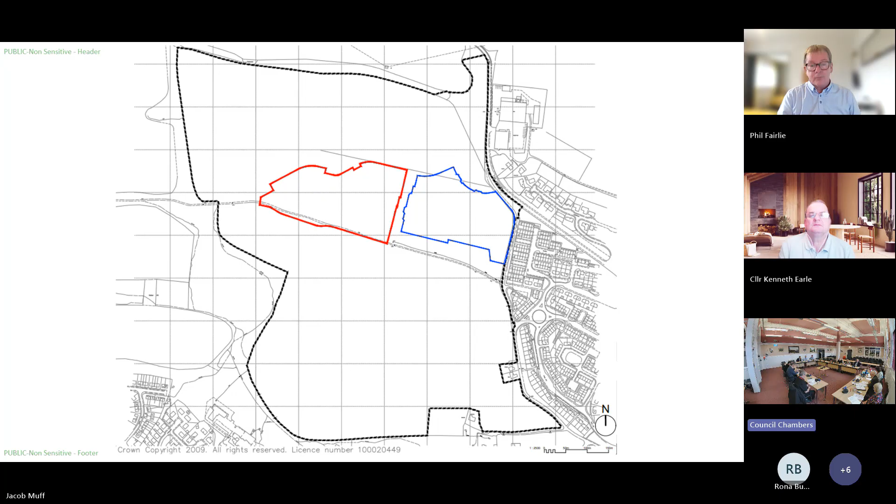This paper is an application for approval of matters specified in conditions concerning the 74 house phase at Barnesville, presented by Jacob Muff, principal planner. The background is that when planning permission was granted for the whole site, certain conditions were laid down, which Jacob will go into. Our job today is to approve the matters specified in conditions have reached a satisfactory standard, and we can allow the development of phases 2C, 2B.

Go ahead, Jacob. Good morning, Chair. The application we're looking at today is for matters specified in condition, as you just said, of the earlier permission in principle, which was approved a couple of years back now.

So it relates to the area in red, and there's already been a number of decisions on the wider site, with the background and history given on page 8 of the report. In summary, the site has been approved in principle for up to 1,000 new homes, associated infrastructure and a school. A master plan for the site was also approved by committee in 2023, and none of the earlier matters can be revisited.

This application looks specifically at the detailed design of phases 2B and 2C only, and the conditions of the original permission are broken down throughout the report with an assessment provided for each area. That's the area in red.

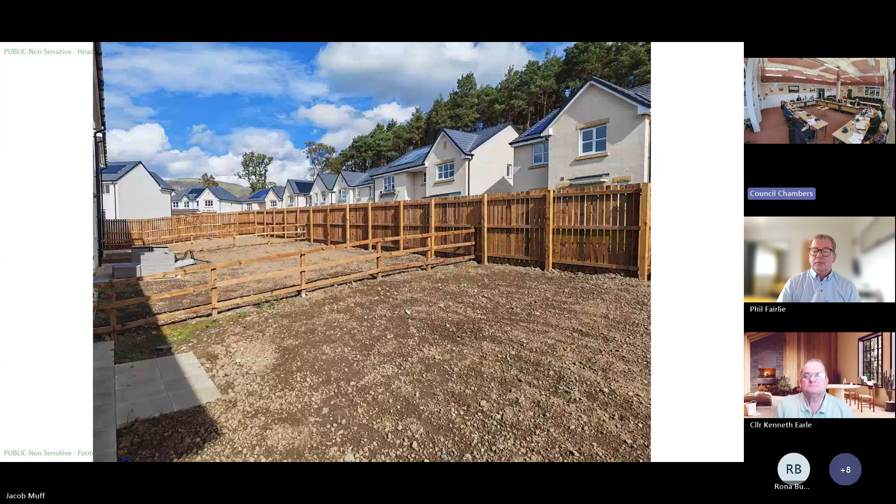This is one of the finished properties, has a paved driveway and is fronted with what will eventually grow to be a new hedgerow, similar to what is proposed on some of the plots here. It has an open plan arrangement to the front, with more private garden areas to the rear. Again, that's similar to what is proposed on these phases of development.

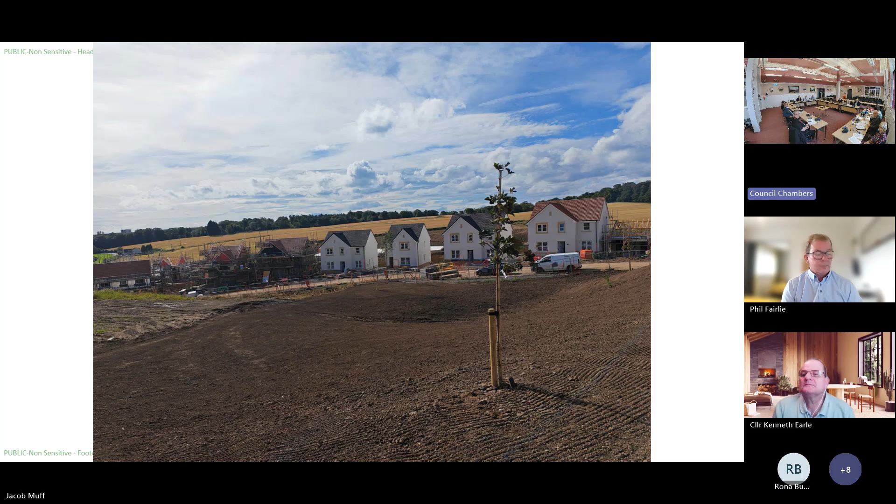All of the properties will have integrated solar panels and present a mixture of different property types, roof designs, finishes and colours.

Render is the dominant material, and the designs are influenced by the other properties seen in the locality. It will form an extension of the existing neighbourhood with connection via a green corridor, focused around the rerouted core path from 10 acres, which forms part of our considerations today.

The phasing plan has already been approved, and phases 1A, 1B and 2A have been given detailed consent and are underway. We're recommending approval of phases 2B and 2C, importantly subject to the conditions listed in Appendix 1.

The main body of the assessment starts on page 12 of the report, and going through the report, conditions 1, 2 and 8 of the original permission don't require any further actions at this point for the reasons set out.

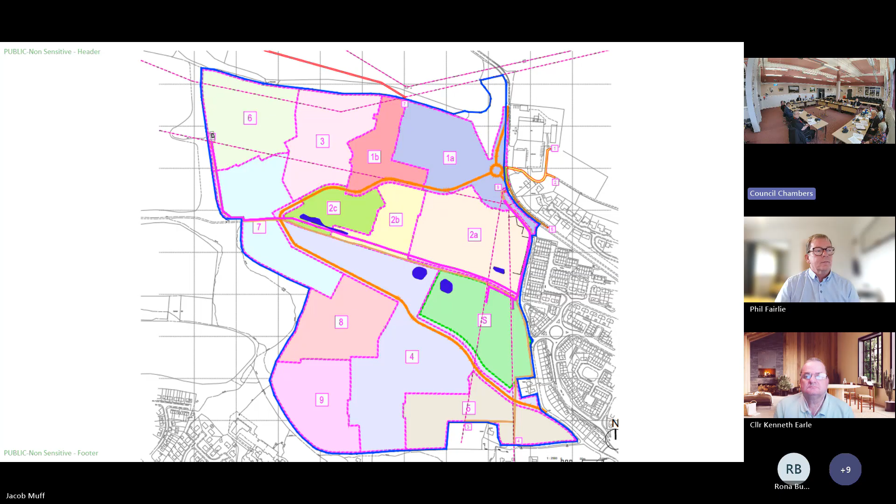Condition 3 has been covered by the earlier approval of the MSC application referred to in 3.36 and was subject to separate conditions applied to that approval, which have satisfactorily been discharged, so they're not revisited.

In terms of the other conditions, condition 4 seeks many details as noted by the various headings. This development proposes 8 different house types throughout this phase, and although they vary in size, they keep similar proportions and similar heights throughout the development.

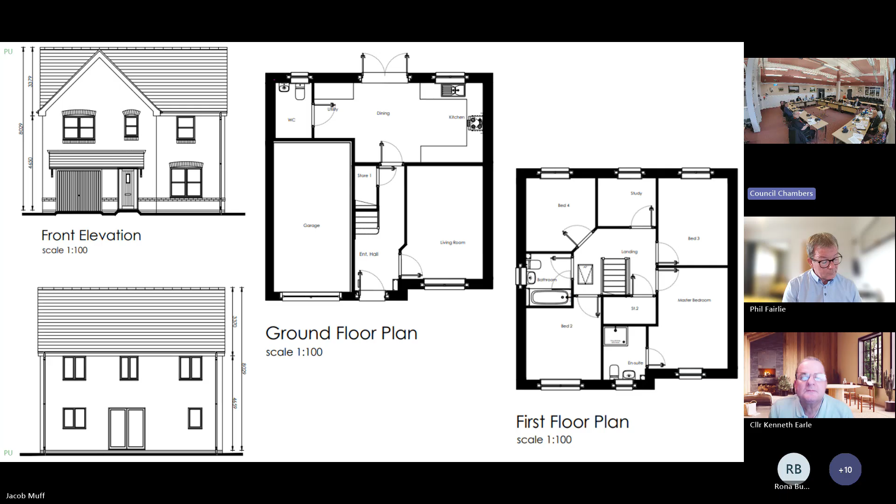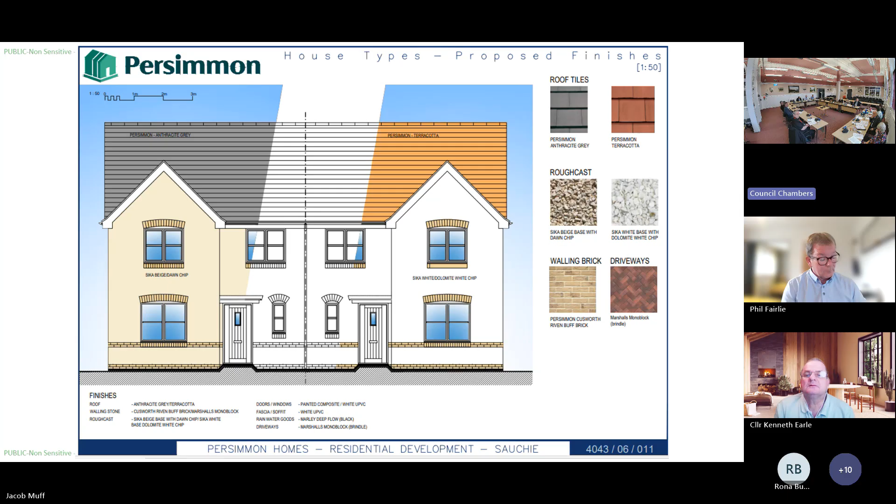The boundary treatments are similar to the photos that I showed earlier, and children's play facilities are currently under construction in phase 2A of the wider development, which was approved by the earlier master plan.

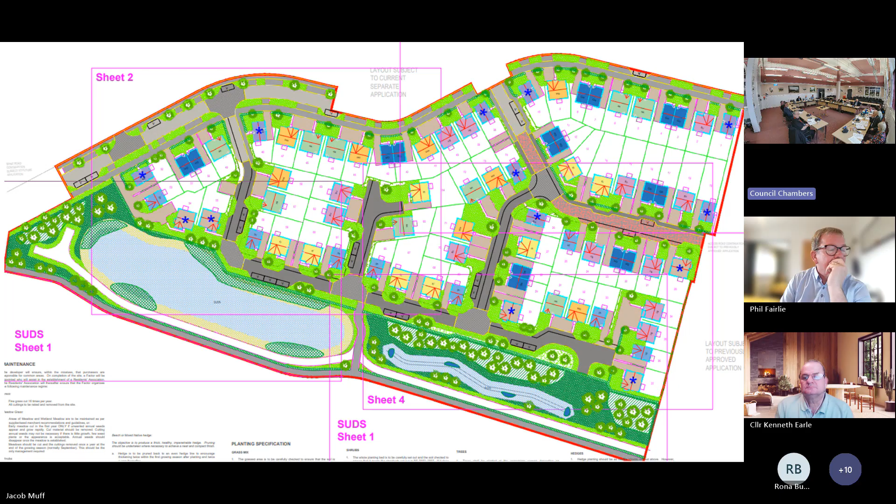The proposal is supported by a comprehensive landscaping plan with more than 200 trees, 1,000 shrubs, and hedgerows which consist of more than 3,000 individual plants. They're also proposing wildflower areas and grassed areas.

With respect to land levels and finished floor levels, each property will have a relatively flat garden, and they will all have level access to each of the main doors.

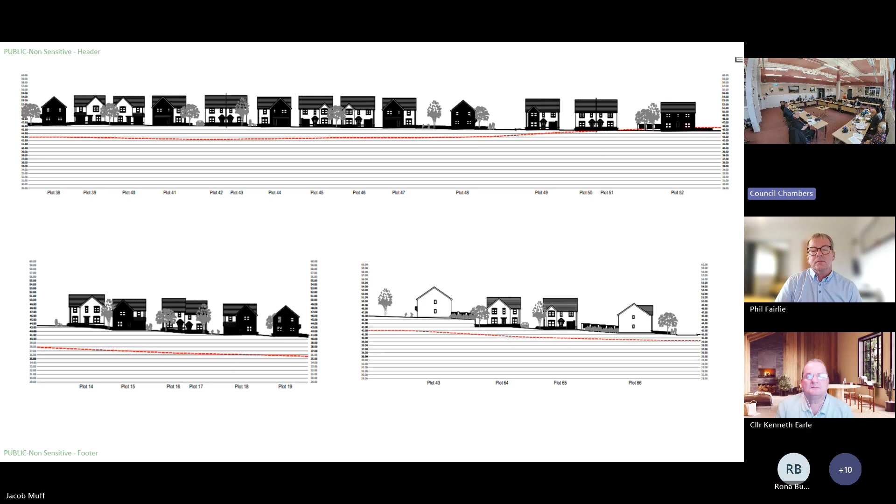The rerouting itself is not considered to raise any concerns, but as seen in the consultation responses from roads and the sustainability team, there were concerns with regards to land levels and the gradient of the path. As it stands, the core path is a relatively flat route with good accessibility, and the rerouting is required to allow the necessary infrastructure to be introduced, but as shown, would become steeper with the proposed arrangements.

We've discussed the rerouting with interested parties, including the Access Forum, Transportation Team and Sustainability Team. None of these have an objection to the slight shift in the route, but we think that a more suitable gradient can be achieved. We've had some discussions with the developer at this point.

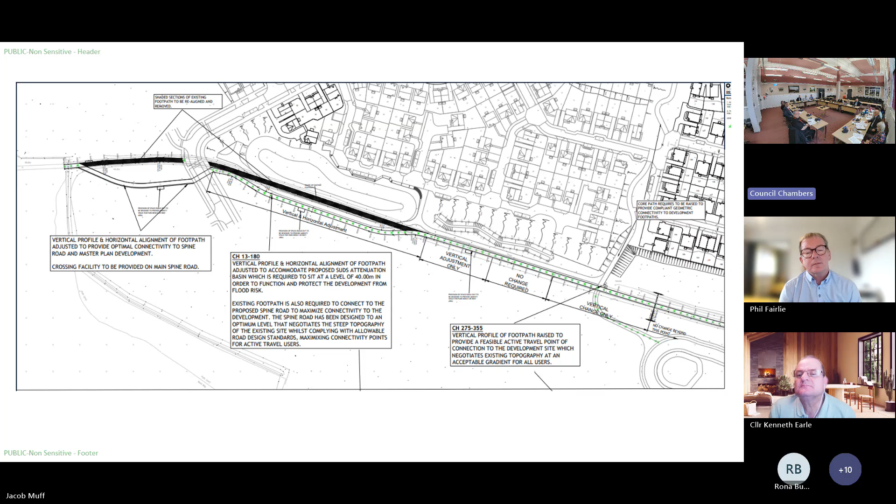Therefore, as part of Appendix 1, we're proposing a condition for a technical assessment to take place separately and to basically keep this as an acceptable gradient.

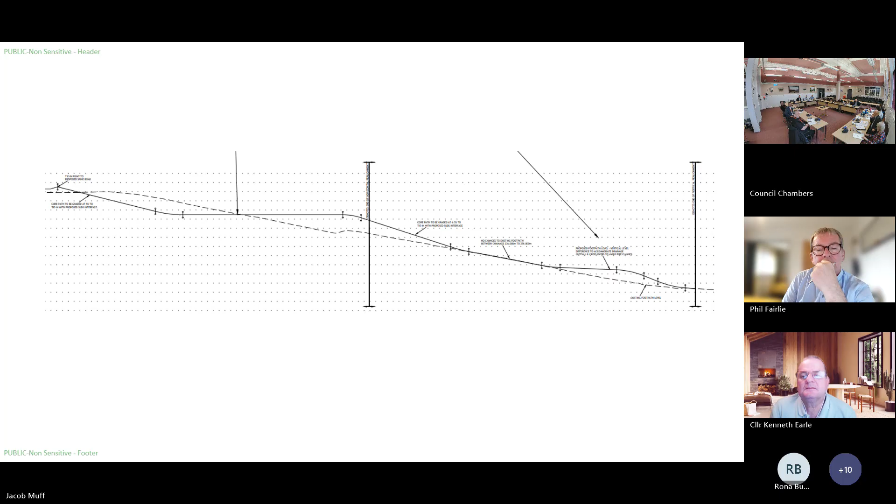In respect of Condition 5, the proposal is in accordance with the earlier approved phasing plan, and there are no concerns raised in relation to flood risk and drainage, with the swale and pond designs designed to an adoptable standard by Scottish Water. There are no trees on this part of the development site, and significant planting is proposed.

Our contamination advisors have raised no concerns, but conditions are also suggested. Although further exploratory works are required and potential mitigation for past coal mining works, the Coal Authority have raised no objections based on the level of information submitted. Licensing will also offer sufficient control in respect of the safety and stability of the land.

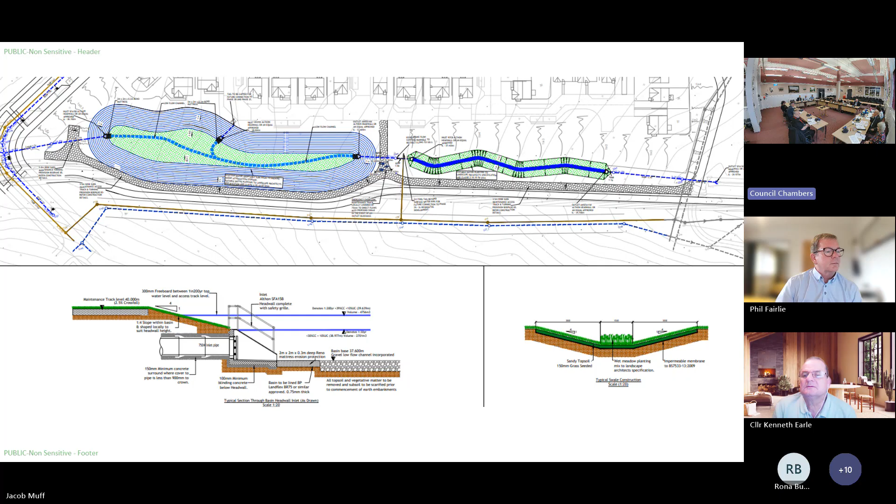With regards to the construction and environmental management plan, there were some issues with these on earlier phases, which appear to have died down a little bit at the moment, but we're looking to reiterate this through a further condition.

The transport impact of the development has been assessed and raises no concerns, and appropriate travel plans, which include sustainable travel, are in place. The noise impact of the development and air quality impact assessments are considered to raise no concern following assessment by the Environmental Health Team, and providing the recommendations of the report are implemented, are acceptable.

Public art is proposed throughout the wider scheme, and consists of a number of Corten steel panels. These are to be delivered in 2032, but form part of the underlying legal agreement as well for the wider site.

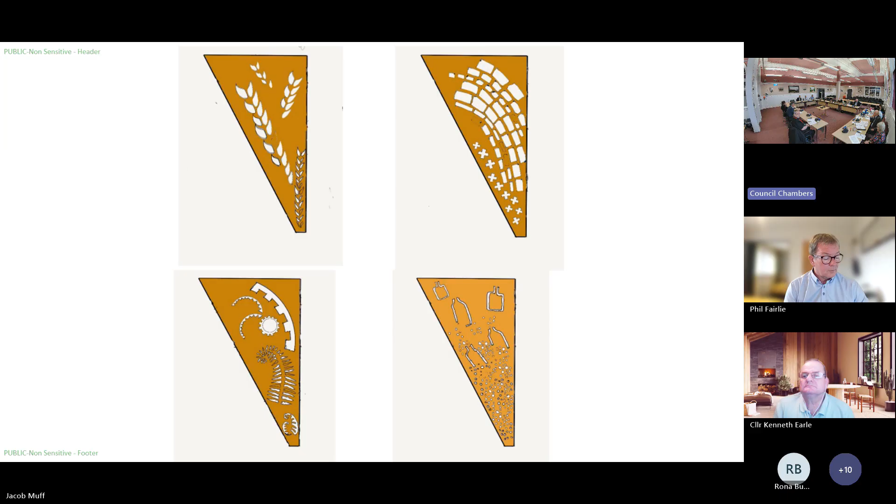Finally, I couldn't find a picture for archaeology, but this relates to Condition 6 and 7. Although there appears to have been some evidence of potential habitation on or close to the site in the distant past, archaeological advice has been sought, and they are happy that these conditions have been satisfied for the phases of development seen here.

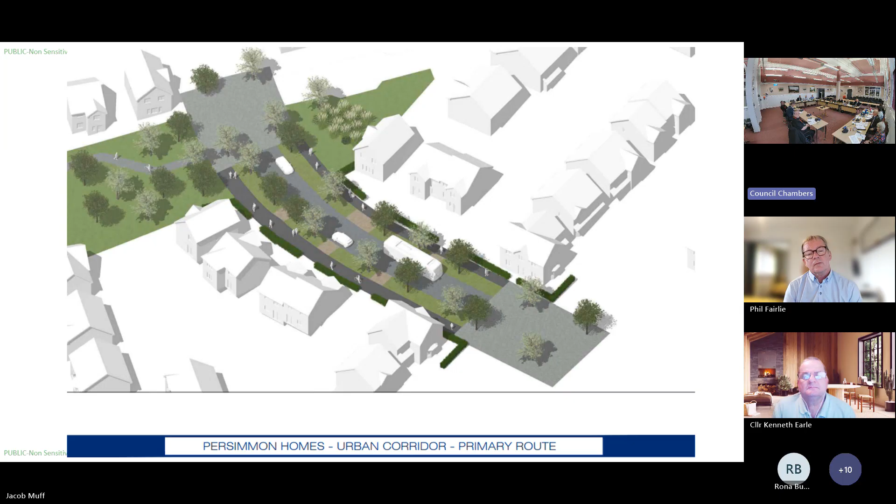So just in summary, we are recommending approval of phases 2B and 2C for the reasons given in the report, and the recommendation is subject to conditions listed in Appendix 1, the details of which will be assessed and monitored by planning officers. Thank you.

Thank you, Jacob. I suppose the overarching question that's in my mind is that we are about to pass or not pass this paper today, but within it, there are conditions which were laid down, discussed earlier, not all of which have been met. Some are still in progress. What comfort can you give us that we're not signing a blank check here?

So I believe that every condition has been met or partially met. For example, in relation to the core path, we're looking at the rerouting. What I'm saying we don't accept today is the gradient and the land levels relating to that.

We believe that there will be an alternative to that. For example, the flat sections which were shown on the earlier plan could be made shorter, and that would mean that the gradients of what are now short, steep sections could be levelled out. Hopefully that answers your question, Chair.

But it does rather depend on agreement being reached, because at this moment, you and the developer have a slightly different view of this. So we would like to think that what you're proposing is going to be the dominant argument. And we might not be happy with having gradients greater than 5%. So how do we accept that?

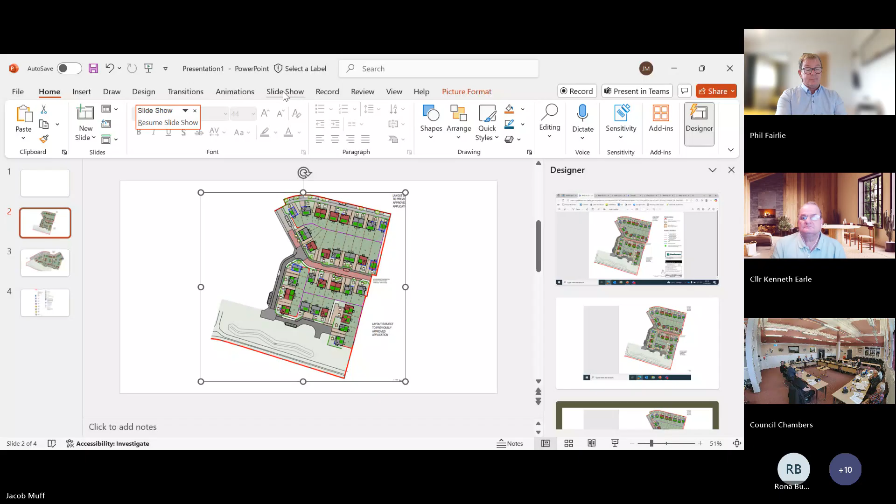So these are the phases separated out - this is phase 2B, and phase 2C. And then details of the different surfacing types which are proposed. Stuart, I don't know if you want to talk about those.

Only to say it's a kind of replication of what's happened before. There is a debate about block paving at the moment. I wouldn't disagree that in some instances block paving's less than ideal - we are trying to move away from it, but we've used it in the council area for decades in many developments. I'm not in the maintenance team, but we have had issues with it, particularly where it's been used on relatively steep surfaces, where it can be more slippy than otherwise likely. But what's proposed - if a developer comes forward with something like this and it forms part of the national design standards permitting its use, it's difficult to say no, you can't use that.

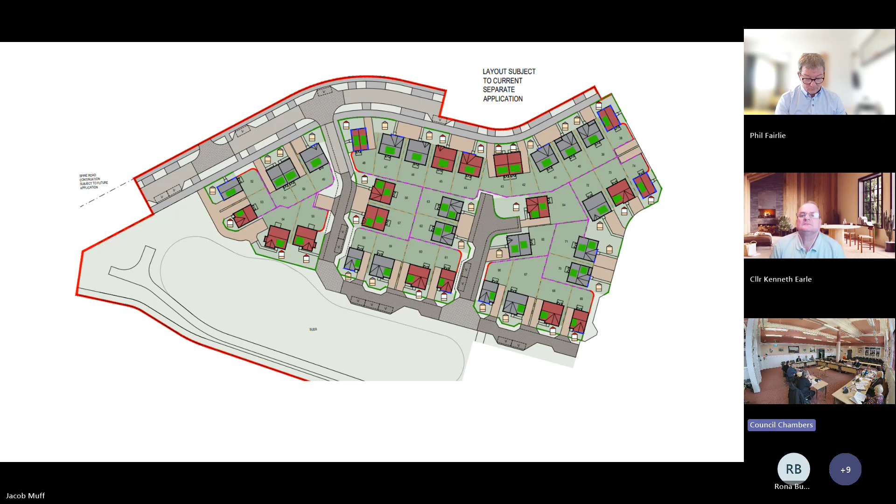And finally, there was the area zoned for the school. Are we satisfied from the Education Authority that we have enough space for the potential for a new school, although I realise the provisions were for the expansion of Craigbank? I believe so. There is an allocated site just to the south of the two phases where we've been looking. The costs have been agreed.

I know Appendix 3, just for your information, says that the costs are to be agreed, but we received first payment this week, which was early from the developers. It's for us to come up with that detailed design, so we've been speaking with the assets teams. We've seen some very high level designs, and we think we can deliver something on that site. We just need to follow the Section 75 agreement, and that will come on later phases.

Thank you. That's fine. Thanks.